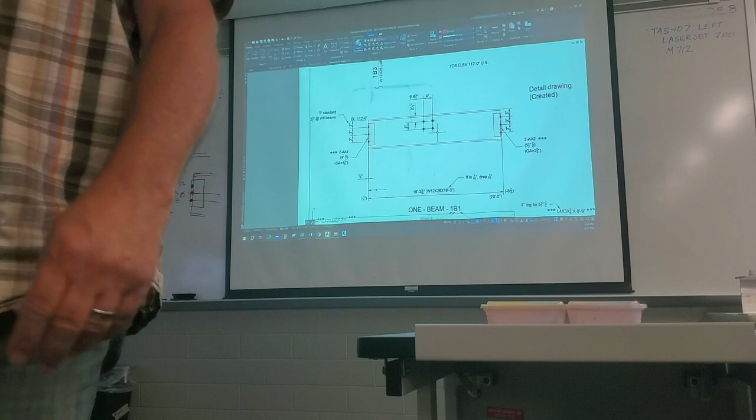Keep in mind that if you hatch all 3 of those at one time, they're all connected as one hatch. You can't just move or copy or something like that. Okay, I know you can, but it takes all of them.

You have told us like it has to be 1/4, right? Correct. On the left end, yes, it's always 1/4. In what circumstances is it 3/8? Because there was one assignment that it was 3/8.

No, the 3/8 I was showing you was your angle thickness right here, so just the angle without the beam. That measurement right there is 3/8. That's your angle on the end.

And then an angle has holes in it. It's welded to your beam. That is the thickness of that angle. 3 by 3 by 3/8 thick angle. That's the 3/8. The end of the beam is always 1/4 of an inch.

Yes, some of y'all, I think we cleared that up. Some of y'all I did ding for putting 3/8 right there. Was you? I've got some more stuff to hand back to some of y'all too, here in a minute.

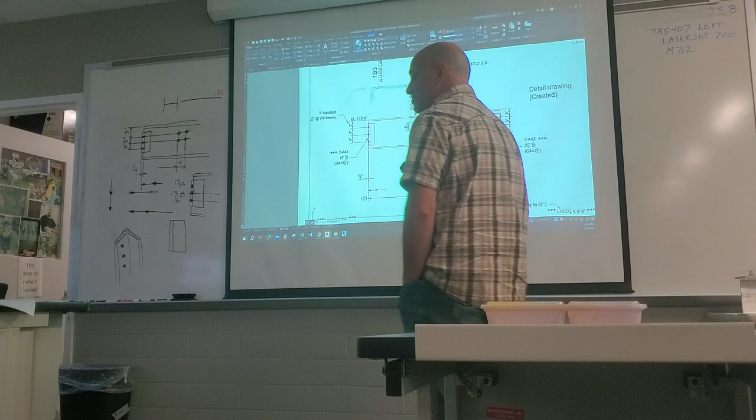Alright, so on the project that I just gave you, the first page are these sections. Let's go ahead and flip to the second page. I have them in backwards sequence.

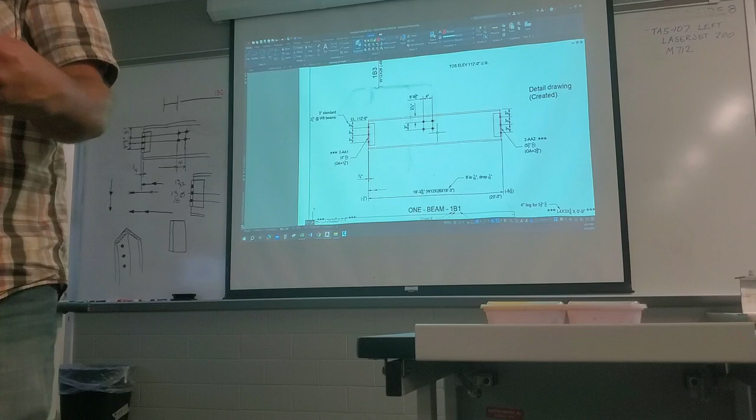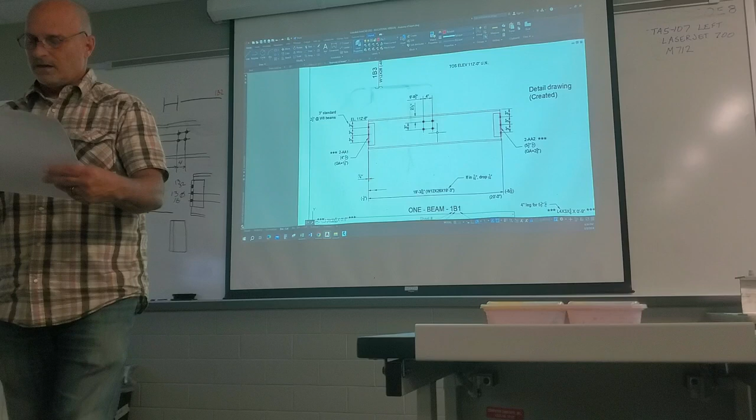On the second page, what you have there down at the bottom tells us plan, so we know it's a plan view, plan at elevation 18'0". Line weight didn't show up on this, so if y'all need me to, I'll probably go ahead and print some more with some thicker line weight on this drawing.

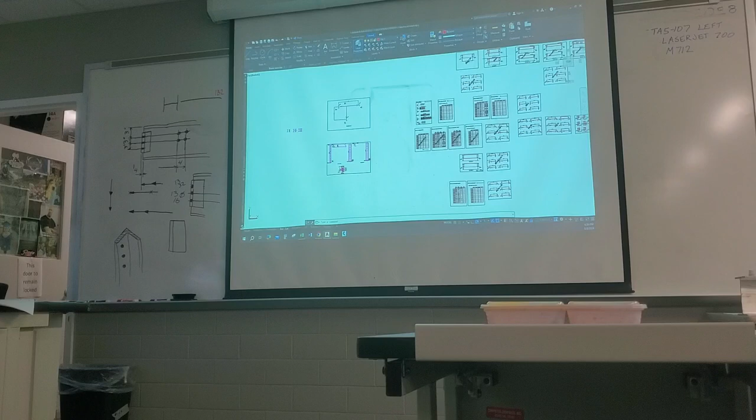What we've got there is a column on the left, column on the right, so you've got a column on the left end of that beam down there. We're attaching to the web. You've got a column on the right end, we're attaching to the flange. So this is one of the beams that you will be detailing right here, a W14 by 61. That W14 by 61 stretches from the column web of a 14 by 48.

Man, the graphics on this stuff, look at that 6 right there. I might need to restart it in a little while. I cleared it up, RE and spacebar did it. So we're attaching to the web of this column. On this end, we're attaching to the flange of a W14 by 61.

That beam, it says plan at elevation 18 foot 0. So when you look at some of the work that you've been doing and some of the handouts that I've been giving you and you've been looking at, you will notice that on the beam we normally show the elevation right there on the left hand end.

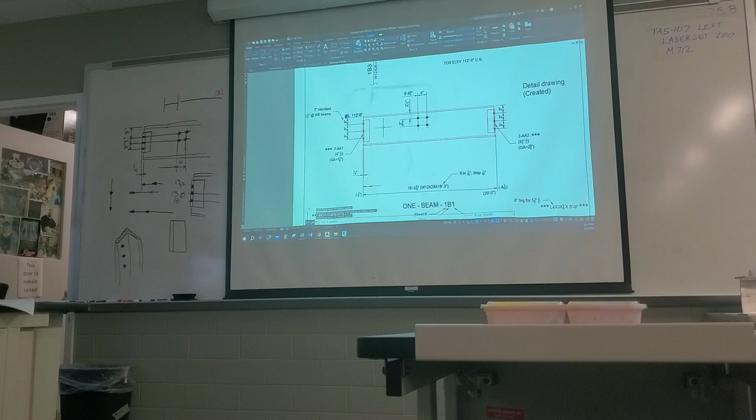So I haven't been having y'all show that because we haven't been having a given elevation. We've just been having, here's a beam, here's a column, here's a column, here's another beam. We've just been having those simple guys just floating out there in space. Were they at 50 foot above sea level? Were they 1,000 feet? Didn't matter.

We were not concerned about elevation. So that is going to come into play on your next project. You will need to show me right there that elevation.

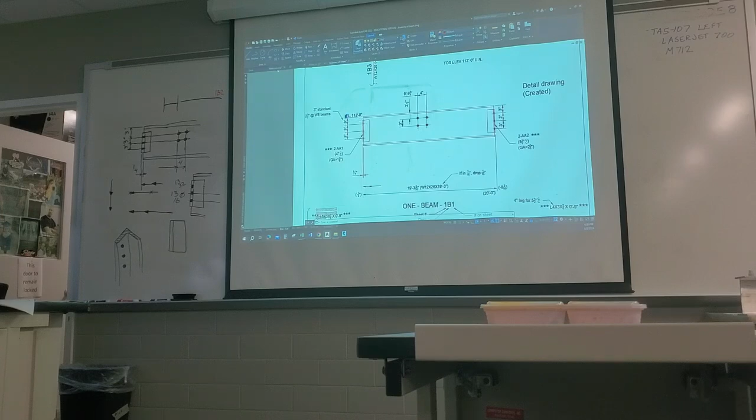So they're at elevation 18 foot 0, top of steel on those beams. So once again on this end we've got a column that is in this position in the real world. Remember, that's a plan view, so we're looking down on it. We've got a column over there, our beams attaching to it at an elevation of 18 foot 0, I think is what it was. So visually we know what's happening up there.

We know our angle because it's attaching to the web of the column. We know our angle's going to have, our beam's going to have 4-inch center to center. We know the minus dimension's going to be in the 1/8 to 3/8 range. We're not going to have to block.

On this other end, we're going into the flange of a W14 by 61. We know that it's going to be probably 3.5 or 5.5 center to center the majority of the time, that's what I told y'all. We know that it's going to be about -7 inches. And it's going to have some holes out here, similar to that one that we were just looking at.

We know that this one right here, W12 by 30. On this end, it's attaching to the flange of a column, so we're assuming it's going to be 3.5 or 5.5 center to center. We know the minus dimension is going to be about -7 inches because it's a W14. We know on this end it's a beam-to-beam connection.

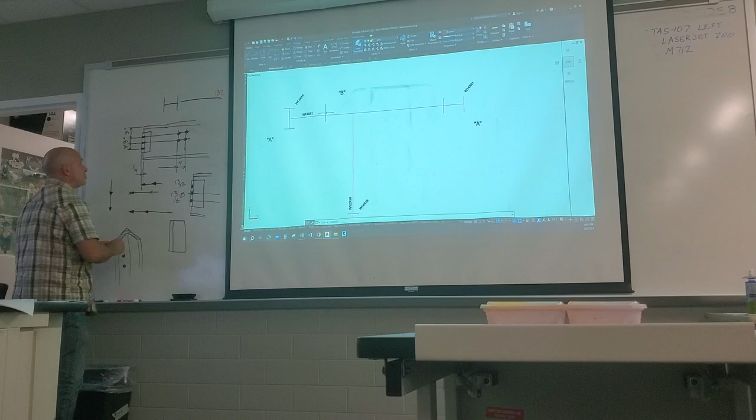Remember, these tail dimensions are just showing this measurement right here, without doing a bunch of dimensions. So like I said, right here, we know that we're already going to be subtracting 2 inches on that end.

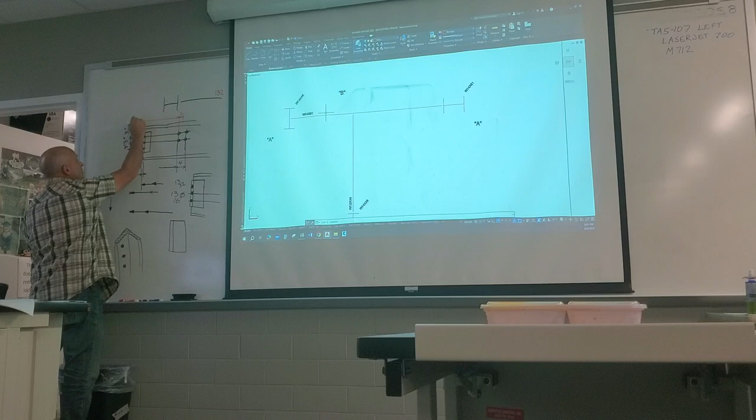Over here to where that dimension goes, we don't know. Maybe we're attaching to the web of a column. Maybe we're attaching to the web of a beam. Maybe we're attaching to the flange of a column. Doesn't matter. We still have to subtract our way back to the face of our angle, the heel of that angle right there.

But we're gonna have that minus dimension written down there anyway, so it's not like we have to look up a bunch of different stuff. That's part of the things about showing your work that I always liked in structural, because your work is on there. It's not just here, go build this. Lots of times I could look at it and say, that math just doesn't look right, before it ever leaves my desk and goes to the checker.

10 foot minus this equals 5'3". No, I think I did some math wrong.

So doing this work on here on this column, on this beam, we kind of already know what's gonna happen. This W12 by 30, like I said, one end's a beam to beam connection, block top only, the other end's beam to column flange connection, about -7 inches, 3.5 or 5.5 center to center, about -1/8 to 3/8 on right here on this end.

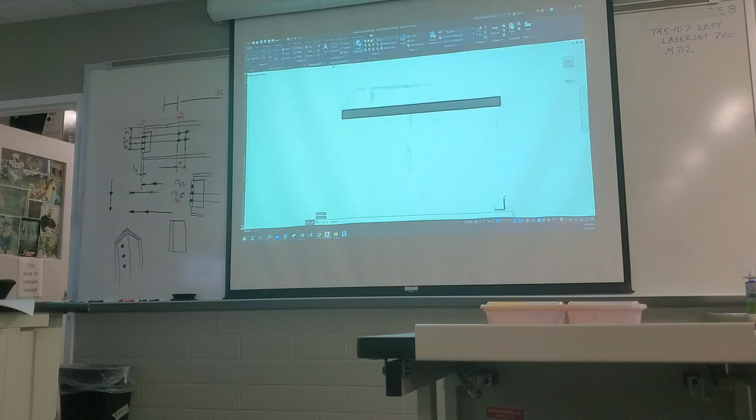This one? Yeah, you see how you have a 9 foot, 9 3/4? Uh-huh. So you know where to draw the 4 bolts in the beam. Mhm. And the paper you gave us, we don't have that dimension at the bottom to know where to draw it on the beam.

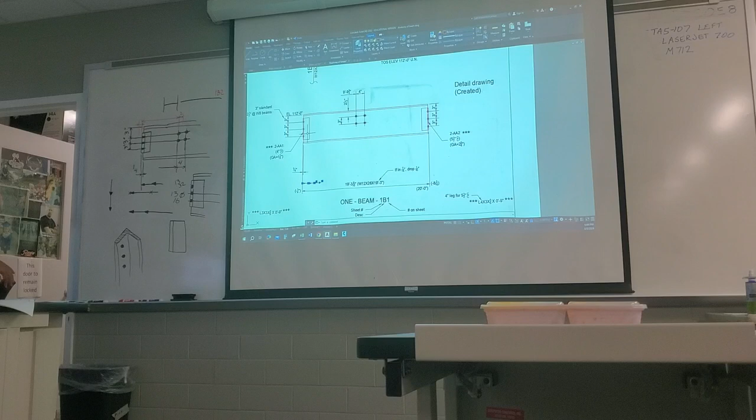Yeah, I didn't show that dimension. I'll revise that and give y'all that measurement in a little while. Yeah, I left that one off, maybe. So yeah, I'll check that in just a second and give that to you. In fact, while we're talking about it, let's go ahead and check it now.

So show a measurement from the center of your column to the center of that beam. And that measurement is not 4 foot over 5/8. That measurement is 4'0". I'll turn it on and add that dimension to this page in a little while. But from the center of this column to the center of this beam, a distance of 4'0". We'll go ahead and turn those on now and do that.

So everybody got that? Alright, so this drawing is the plan view. We're looking down on it. We're looking down on 3 columns and 2 beams. Where you see these sizes drawn, that is going to be the left end of your picture. Does everybody understand that? Where I show you the W shapes on this page, that will be the left end on your detail.

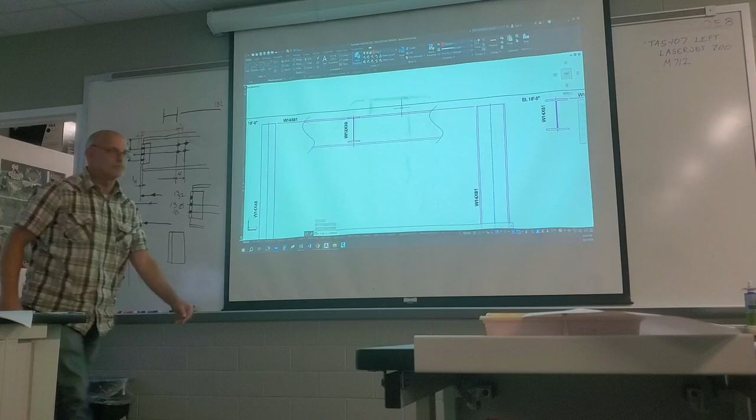So does everybody understand what you're looking at in that view? We're looking at that beam going across there. We're just not showing the end of it. Does everybody understand that? That's how we're drawing it with the splines on it? No, you're drawing it just like you've been doing. All the way? Yeah, this is just the erection drawing. They shortcut stuff.

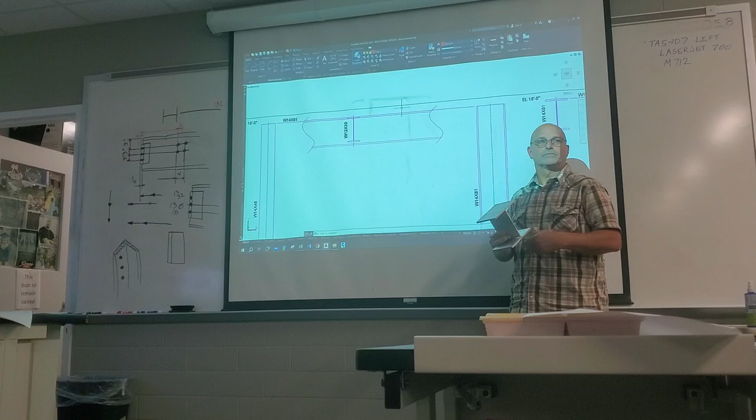And then we've got a beam that's attaching right there. But yours isn't gonna have that beam right there. Your W14 by 61 is gonna have a hole pattern right there. You're gonna have holes 4 inches apart, down 3, 3, 3, however many rows you need. So that's similar to what yours will look like, but not really.

Yours is gonna look more like this. You're gonna have your angles on the end. You're gonna have your 3, 3, 3s. You're gonna have your elevation. I'm not worried about the AAs. You can just go straight to center and gauge. But you're gonna have all that.

You're gonna have your quarter, your minus dimension, your tail dimension. Same stuff you've been doing. Your overall, your minus dimension, your angle stuff, all of this. You're gonna have holes out in the center. You're gonna have your label below it. But on the erection drawings, it's just here's what it kind of looks like, giving you an idea. Once again, the sooner you can visually see that, the sooner you can understand what all these lines mean.

So this is section AA. If we were to walk up to it, once it was built out in the field, this one on this side would just be looking at the flat of that flange, just like if you were to walk in the classroom and look at this guy. This one over here would be similar to what y'all are looking at when you look up here at these columns.

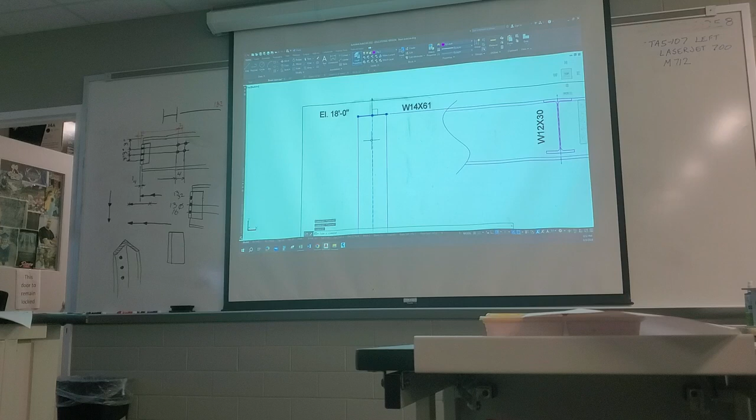So once you come over here, you will see that each one of these have an elevation at the bottom of the base plate. Each one of these show you an elevation at your beam top. How tall is that column? Well, if this line right here is up at 18 foot 0 in real world, and this one at the bottom is at 10 foot 0 in real world, anybody want to take a guess on how tall that unit's going to be when it leaves the shop? 8 foot.

Bottom is at 10 foot 0 in real world. Top is at 18 foot 0. We don't need to tape measure to measure. We've got the information right there. They don't have to show us that formal dimension. When you get out into petrochem work, you will be working off coordinates and elevations. North, south, east, and west coordinates. Some of y'all may have had me for basic pipe. You may have already heard that. That's how we locate and do it. We're not going to show all of these dimensions, just cluttering up these drawings, because there's going to be enough information that we're trying to show on that drawing.

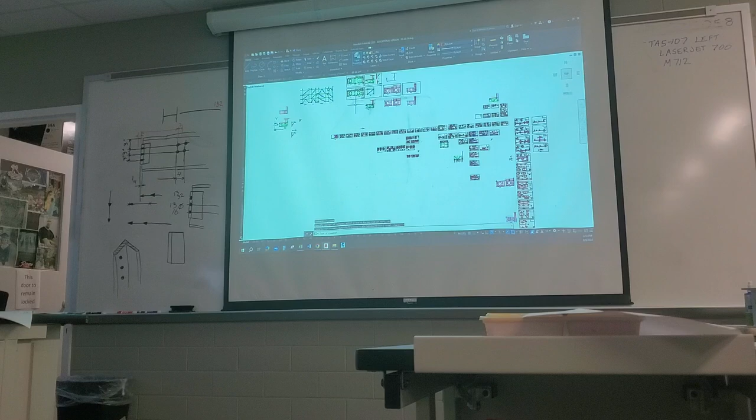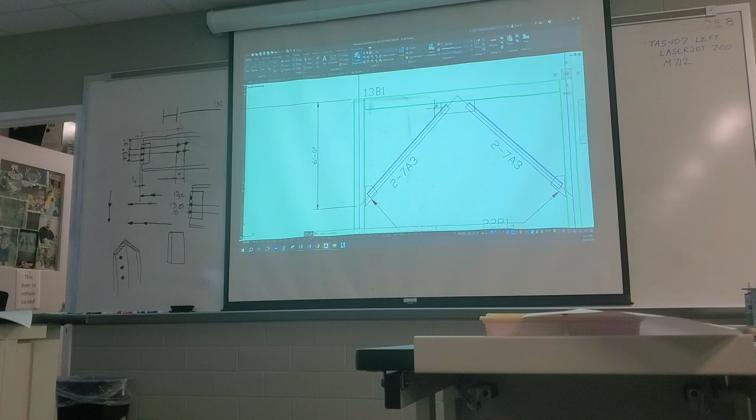Typical example of an erection drawing. That would be a plan view right there. That is a plan view and some sections. These are the elevations, the outside views of that. So there's too much stuff going on for us to try to show everything on these drawings. So we show enough to give them the information they need, to give them an idea of what it would look like if they were to walk up there.

But if you go find somebody that's been in accounting for 30 years and you say, here, go find this out there. What? Well, go find what? What is that? You as a drafter, when you walked in here, if you were like me when I first walked in here, you were like, what is that? Just a matter of going to look and investigate. You've got them sitting on that desk, hold them in your hands.

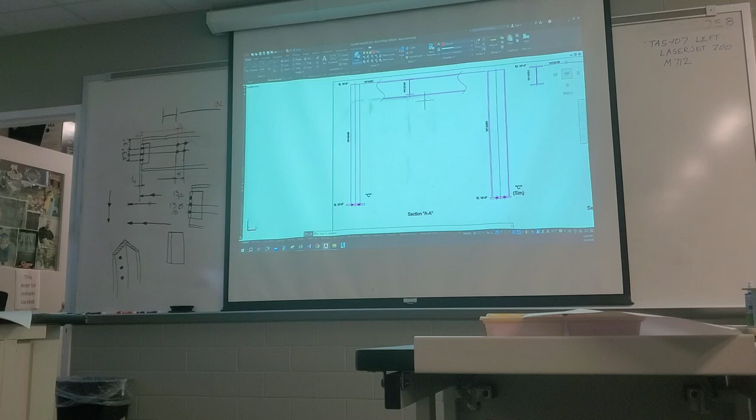Down here at the bottom, we've got your section C. So if I turn those dimensions back on, section C is just like that last column you did. This is a section looking down on that base plate. This one says section C. This one says section C similar. This one says section C similar.

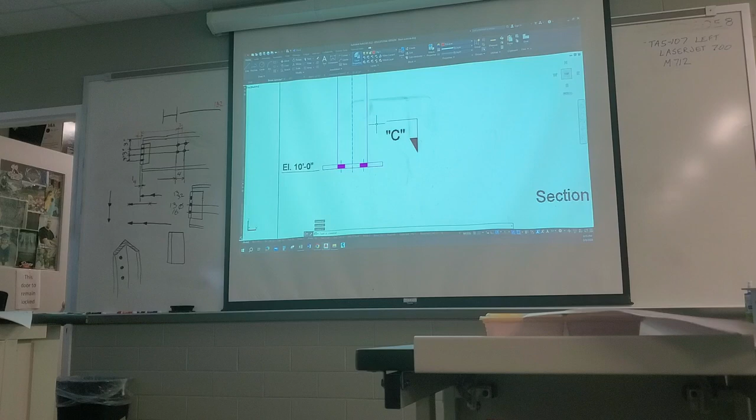The reason being is that if you were to cut this section right here, if you were to take those objects just like they are and say, let me look at it right here, that is the way that section looks. These other two columns are turned 90 degrees. So if I were to come down here in this view and say, well, instead of saying the section C similar, I'm gonna do two sections.

I wanna get a little bit extra money out of this. So I'm gonna tell my boss that I drew it twice.

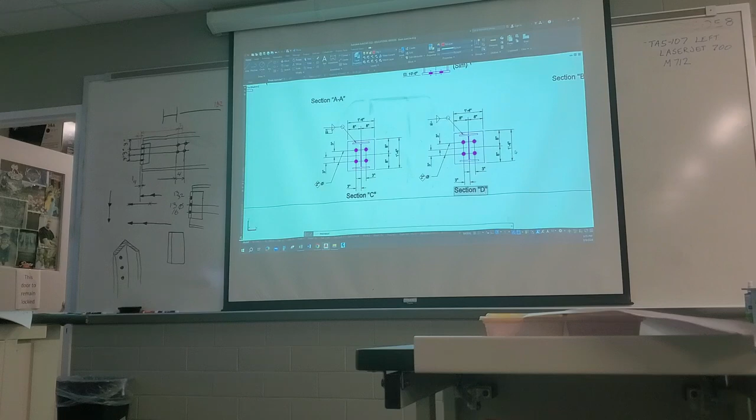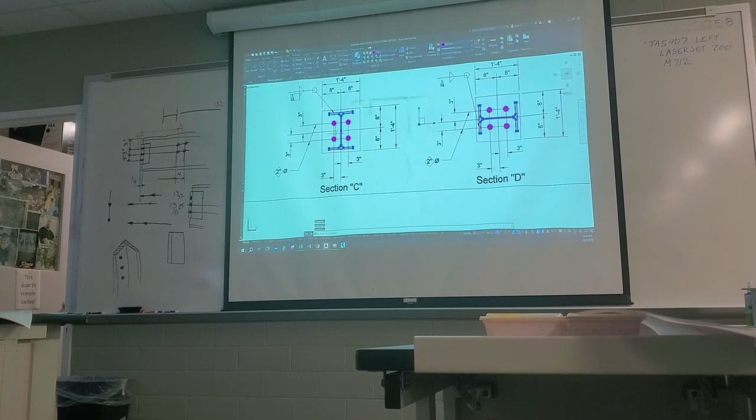I'm gonna call this one section D. And then I'm gonna come in here and just flip this guy around. There's my section D. Why did I say similar on those other ones? Because it didn't look exactly like that. That column was turned 90 degrees on those other columns. The section wouldn't have looked the same because of the column position. But measurements were all the same. It's just a matter of rotating that guy right there.

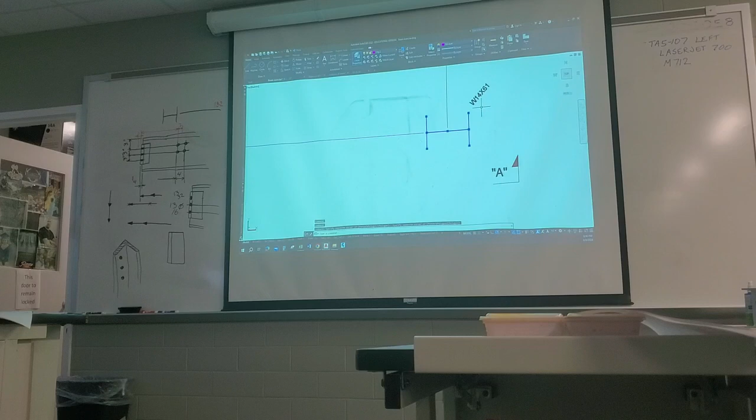So having that section C similar right there, knowing what those I-beams look like, knowing that those two parallel lines right there represent the flange, knowing that because we saw it in this view right here, clearly showing that it was attaching to the flange, so we knew what was happening. Right there, that's attaching to the flange, so we knew what that was. Instead of drawing or doing the extra work to put that out there, which wasn't much, we just put notes like similar.

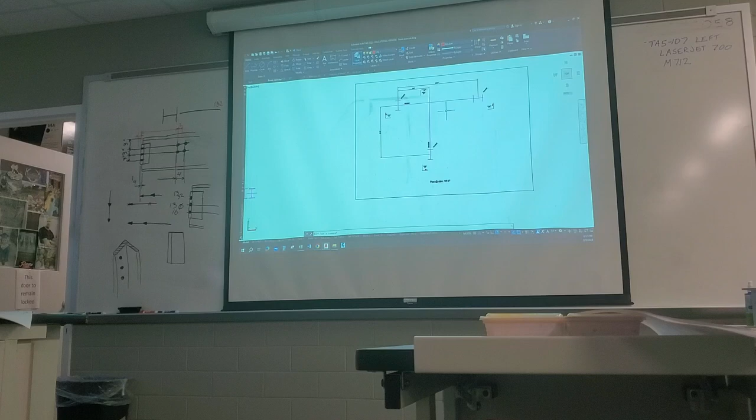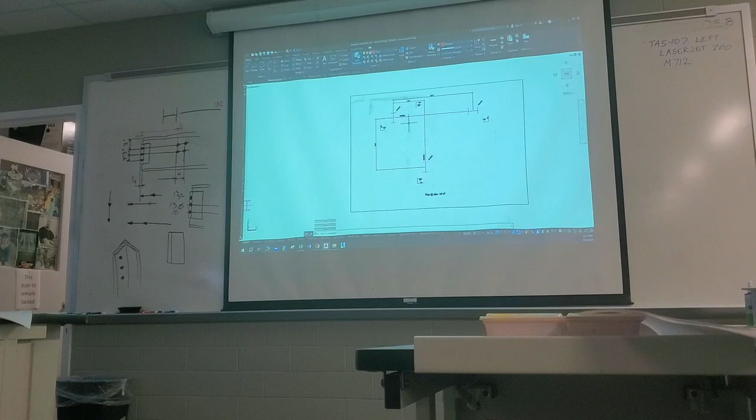So your next assignment that is due 1 week from tonight, which is the same night of your finals, same night as your notebooks. 1 week from tonight, you will be doing, let's say, both beams and 2 columns, because they're all 3 different. It's not like you could detail them and say, okay, quantity of 2. There's something different about each one of those columns on the detail. So 2 beams, 2 columns, 3 sheets. You can't fit 2 beams on a sheet, but you might be able to fit both columns on 1 sheet. Give it a shot.

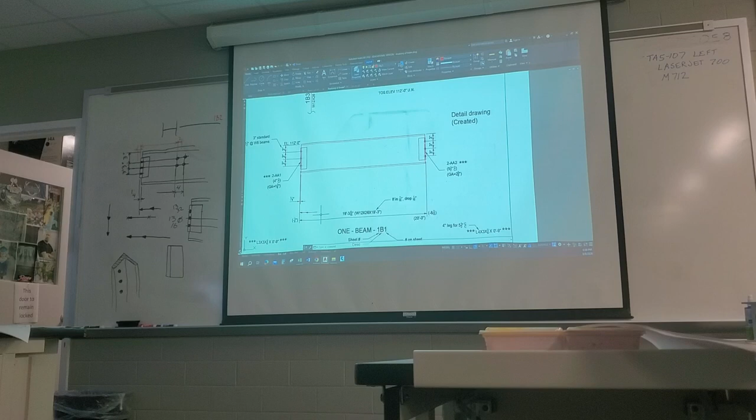So you're gonna have 1 beam that's similar to this, column on both ends, holes in it. You're gonna have another beam that's similar to this with a block right down here somewhere, a blocked end because it's beam to beam. So that's your 2 beams. Perfect example of those in what you've been working on. Here's a perfect example of your column. Just once again, different measurements, different locations possibly, but this is a perfect example of the information you will have to be showing.

So any questions on what you're working on to be turned in either next Monday, which is the assignment that you're working on now, the 3 sheets, 6 details. That's for next Monday. And then for next Thursday, 1 week from tonight, 2 beams, 2 columns, notebooks, finals. I got a question about the notebooks. The first day of class, you told us to do 5 tabs, but I don't know what's a handout, what's an assignment, and what's a project. I thought they were all the same thing.

No, I can give y'all that info. Previously in Blackboard, it would tell y'all, but I think it was about a year ago, maybe back in the spring semester, that someone said, hey, they don't show us those anymore. It doesn't show what section it goes in. So any questions about this part right here, about what your homework is before I leave that? All right. So in your Blackboard, you're correct about that. It shows 5 tabs. So if you want to make note of it, I will tell you what I show in each one of the sections so far.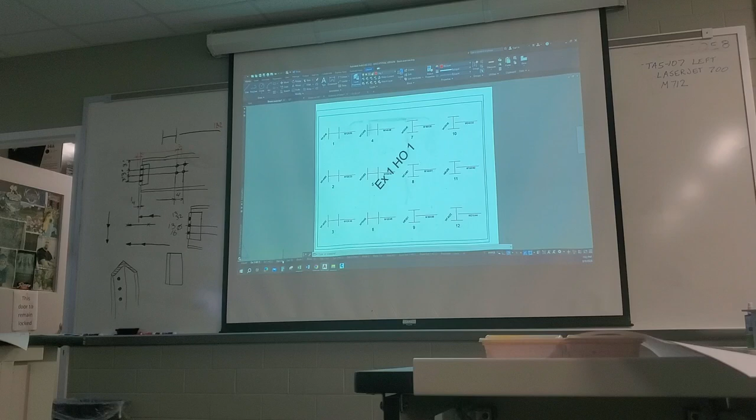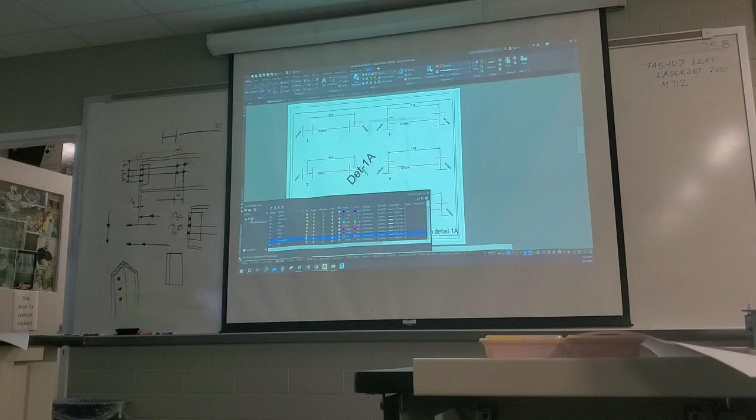So the 3 sections I'm gonna be looking for stuff in. In your assignments section, I have that first little project that y'all did. It was called Beam Exercise 1. That was this guy right here. You just had the little half beams. That went in the assignments section. And I think this was the next one right there. Those beam detail 1A, yes, that's your beam detail. That's the only other thing that I have in the assignment section in Blackboard. And in the grade book. So that will translate to your notebook.

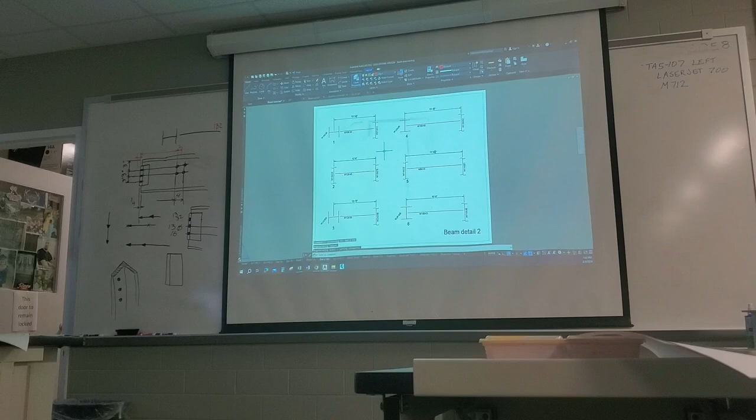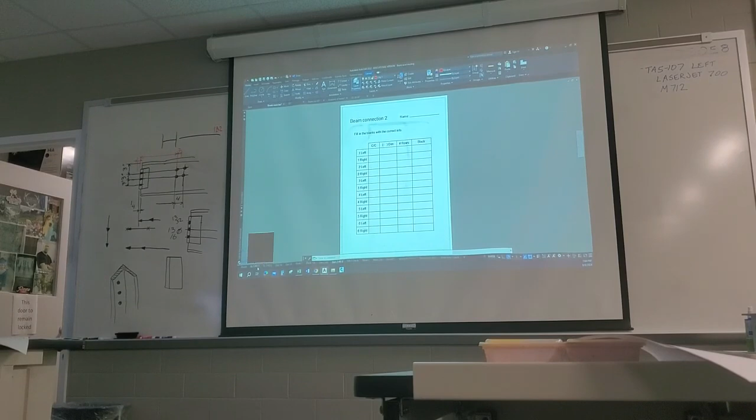For the projects section, you had another exercise that you did similar to that one. The first one that you filled in this little chart on, beam connection 2, beam detail 2. This one showed the whole member with the beam to beam connection on one end on some of them, 2 ends on the other ones. Actually, no, this is beam connection 2. Yeah, this is beam connection 2. This goes in your project section. I'm gonna have to find beam detail, the other grade, for your assignments. So right now for your assignments, you've got this one right here. For your projects, you've got this one right here.

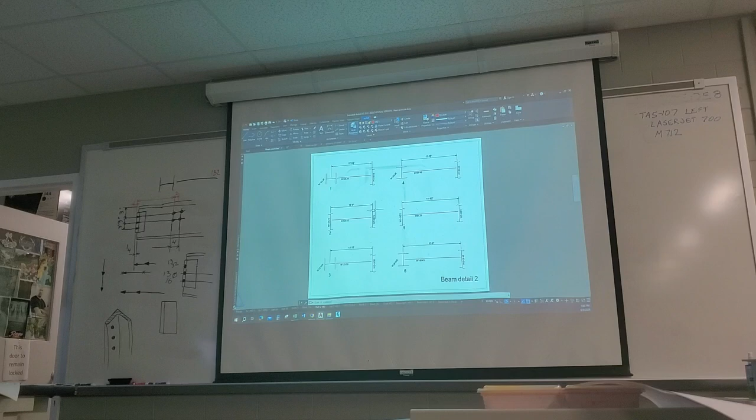What's the purpose of the notebooks if you've already graded the papers, handed them back? To see if you can keep your stuff together and stay organized, and if I can promote you in the industry when the boss comes and says, how are they? Well, they're great till you take their work from them. It'll look good if it's on the computer. Yeah. But man, you don't want them to hand you anything. You don't want this person sketching or keeping track of the project. And because I'm a teacher, I get to. No, I was just curious, cause. That's the main reason. I want y'all to have something to go back to later, and maybe some little organization skills. 'Cause I noticed that's in every class. Mine, yes. I can't speak for other people, but if you take one from me, I'm gonna make you keep your stuff, at least till the end of the semester.

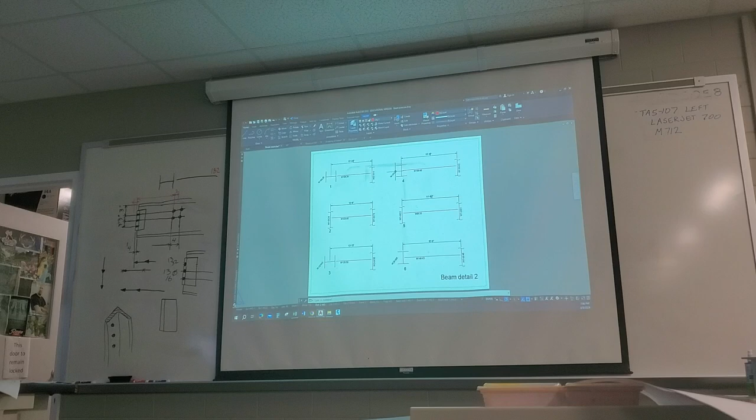I think drafters ought to be proud of their stuff. If you still got it 2 years from now and you're using it, if you still got it 2 years from now and you're not using it, you're prepared to use it if you need to, that's a good thing. As someone that works in industry, trust me, you come in with a notebook and some previous stuff, so you got the reference on the new job you're going into, you're gonna look a lot better, look a lot more professional than the person that just shows up on day one with their phone in their hands. Priorities. But no, I want you to do it for my class, but I want you to keep track of your stuff past the class. Okay, I just didn't know if it was like a curriculum thing, cause.